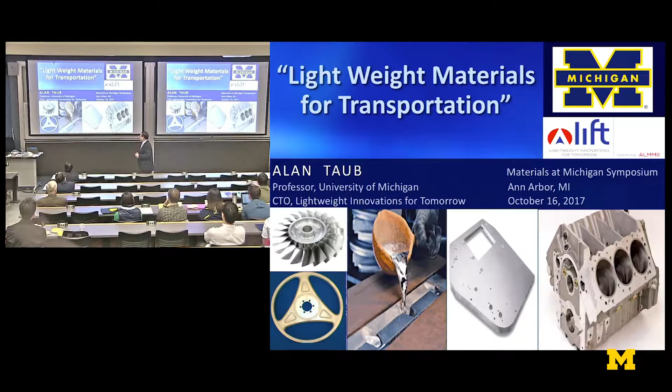What I want to talk about today, and I think it's along the lines of what went on yesterday, is more around structural materials, and in particular, how weight reduction plays in improving transportation efficiency. As John mentioned, I started my career at GE, among other things worked on turbines, both land-based and for aircraft engines. And when I moved to the automotive industry, one of my biggest surprises was the inefficiency of vehicles.

68% of the energy in the gas tank is lost during the combustion process. By the time you look at the rest of what occurs in the powertrain, for every 100 joules of energy in the gasoline, only 17 joules actually gets to the wheels to move the vehicle. And of that, about a third of it is pushing air out of the way, a third of that is heating up the tires and the pavement, and only a third gets turned into kinetic energy.

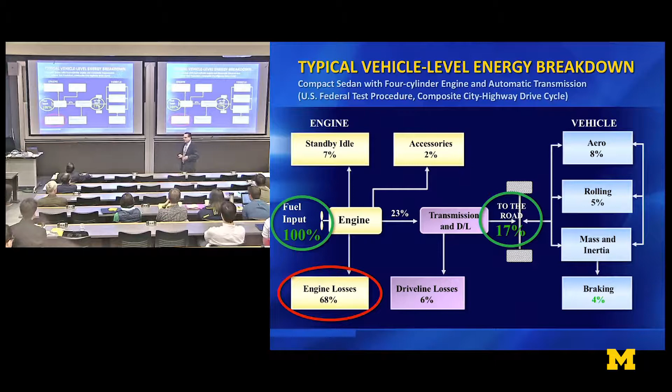So the key is there's lots of work going on here. By the way, this is the reason why the end game for vehicles is electrification - it's a much more efficient transition of chemical and other energy into motion. The key is getting that more cost-effective. On the other hand, independent of what the powertrain is, lowering the weight makes the vehicle move more efficiently, or in the case of commercial vehicles, I get to carry more payload, or in the case of military vehicles, I get to do more mission. So reducing weight is critical.

A good rule of thumb: 10% weight reduction of a vehicle will give you 6% fuel economy improvement. So if you are the chief engineer on a program, which I actually had the luxury of being at one point, you get a target to deliver the fuel economy of your vehicle.

Your job is to achieve that fuel economy at the lowest possible cost, trading off the losses I talked about before, better aero, better propulsion. Within that competition, I often ask my students to calculate what the value of a pound or kilogram reduction on the vehicle is worth to the consumer. It turns out to be about $2 per pound saved, which makes it competitive with other actions. So remember, $2 per pound saved is the target.

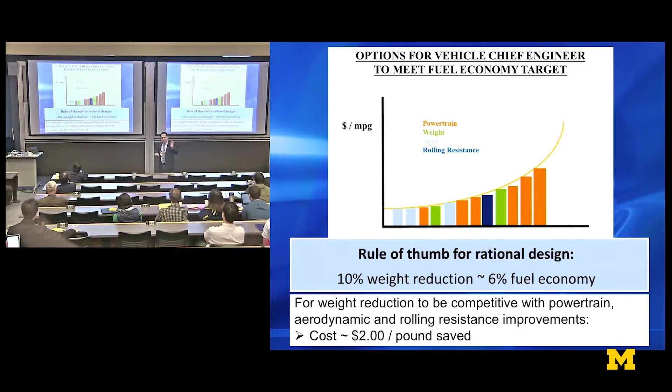I got involved in this through the institute John mentioned. We're working on reducing the weight of all machines that move people and goods, not just on land, but land, sea, and air. I'm learning a lot about ships, working with naval architecture folks, and airplanes. If it's worth $2 to take a pound out of a vehicle, it's worth $200 to take a pound out of a commercial aircraft, and $20,000 to take a pound out of a satellite. That's what it's worth to reduce the energy needed for it to accomplish its mission.

So there are two ways to do that. The first was taken on by the mechanical engineers of the world. I do have a dual appointment, my minor was in solid mechanics, but I believe mechanical engineers look at the world differently than materials engineers and scientists. They'll build an FEA model, and the materials are treated as a continuum. We as material scientists look at the microstructure underneath. In most OEMs, and I've been in three of them, they're dominated by mechanical and electrical engineers, so material substitution is their solution of last resort because of all the risk it has in getting the supply chain going.

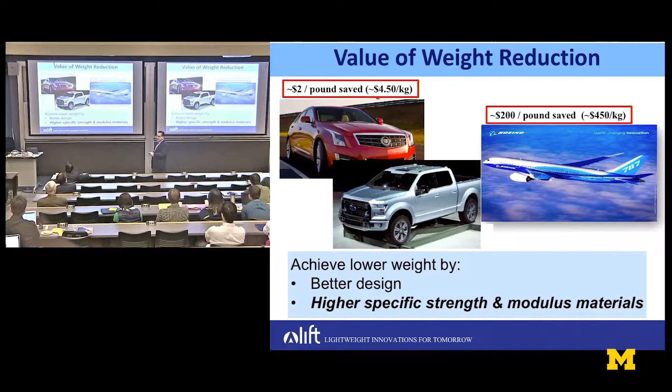There have been prototype vehicles in labs for 30 years or longer, which have shown the kind of weight reduction you can get against what was the baseline material for vehicles, low carbon steel. We've known that for decades. We've also known that each of those material substitutions comes at a cost. The problem is the incremental cost for most of these substitutions is above that $2 per pound saved, with one exception.

It's the introduction of higher strength steels. In particular, it's interesting that the steel industry went through what they called the Generation 1 advanced high strength steel. They tried Generation 2, and it failed. Now jumping to Generation 3, it is the one material that lets you do that substitution at acceptable cost, and I'll go into that in detail.

Metallurgy these days doesn't make the cover of Science very often. We try, I don't know if you had a Science or Nature cover, you know. But we do make the Wall Street Journal often, and it was just yesterday: automakers find strength in steel, and the battle for aluminum and steel is back on. By the way, we got more columns than the battery article, right?

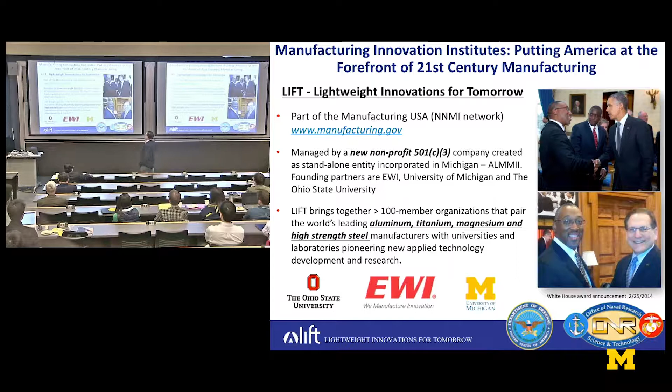But it really has been a strong partnership together with EWI. Our headquarters is actually located in downtown Detroit.

We went into an area that was just about to gentrify. There were burned out buildings across the street. I was all ready to put security 24 hours. It's really nice to go down there now, it's near the old Tiger Stadium, and that whole area is gentrified. In fact, we took an option for 15 years on our lease, which I'm sure our landlord is regretting to this day, because we couldn't rent it today. We couldn't afford to be there.

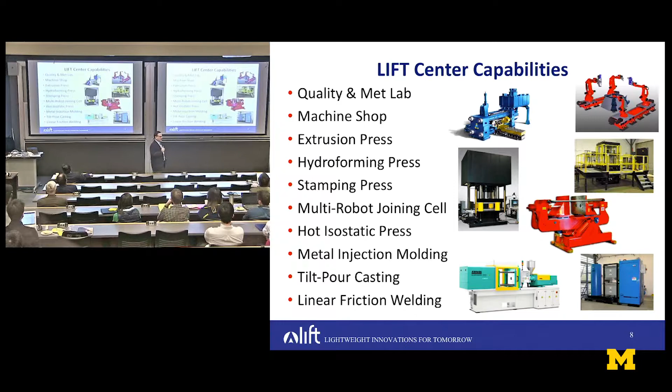One reason I'm doing that is we have installed and recently put online pilot-scale metals manufacturing equipment, and that equipment is available for our students to use. In fact, as long as a year ago, Professor Banu and my students have been at LIFT doing experimental work. So if you need access to pilot-scale manufacturing equipment, please see me.

We made that investment there, plus the university gave us $3 million to put new advanced equipment in the Wu Manufacturing Center down the hall. If you're not aware of these capabilities, please see me.

But let's get back to the technology. We want to reduce the cost of introducing these advanced materials. So if you look at automotive, it has gone through a major change in the last 20 years that exceeds the material change that occurred in the prior 80.

Anybody want to guess what the first primary material in the first vehicles that were produced for the structure of the vehicle was? Wood. There was actually a battle between aluminum and steel in those early days. And by the way, Detroit in southeast Michigan was the Silicon Valley of the early 20th century. There were startup companies, I think close to 100, and they eventually grew up to be the GMs and Fords, just like you have the Googles and Apples today.

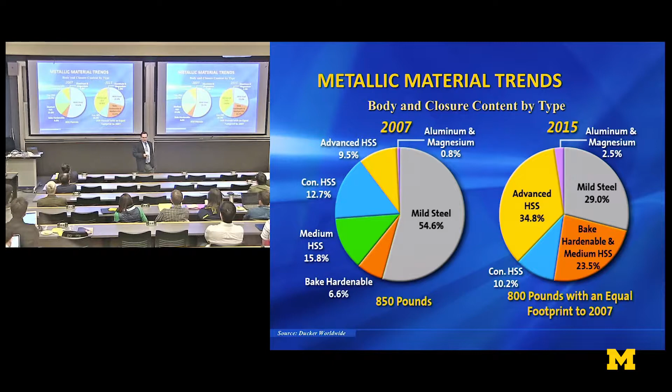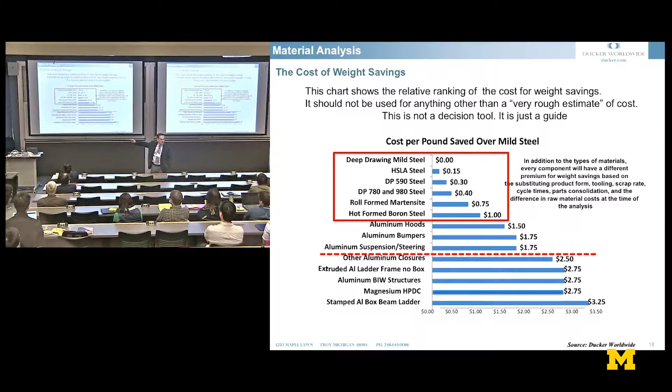What's happened is the majority of the material substitution that has occurred has been the substitution of high-strength steels for low-carbon steels. As you know, when you alloy, you don't change the modulus that much, but you change the strength. If you make something stronger, you can make the sheet thinner, and you make it lighter. And the key is those substitutions can occur for less than $1 per pound saved. Remember that $2 per pound target? So that has dominated the material change in the industry.

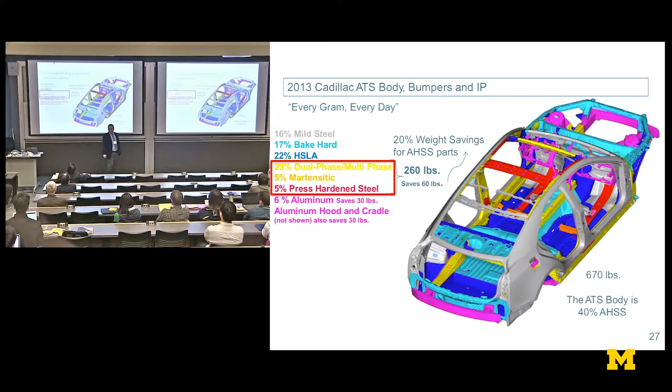I lived through General Motors historically being the heaviest vehicles in their segment, to a focus to become the lightest vehicles in the segment. The Cadillac ATS was the first time we paid attention to that seriously and accomplished it, becoming lighter weight than the Mercedes and the BMW. Most of that was driven by the high-strength steel, but you can see the inroad of aluminum.

And the reality is U of M got out of research and materials for steel quite some time ago, but we are very active with our colleagues in aluminum, magnesium, and titanium, so I'm going to concentrate on that.

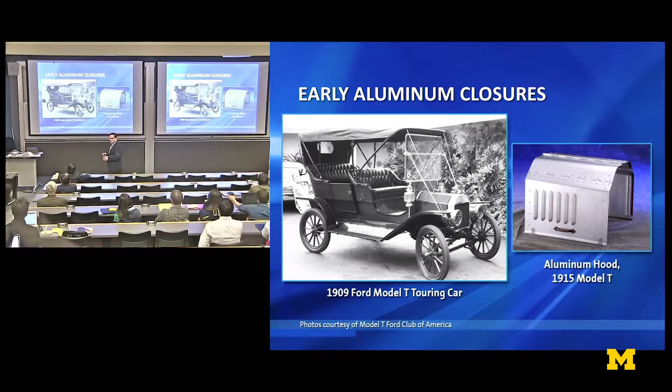I mentioned in the beginning of the industry, there was literally a battle between what was going to replace wood. Steel won. And what's interesting, in the early 1900s, aluminum was expensive because it takes so much energy to make it. It's hard to form, and it's hard to join.

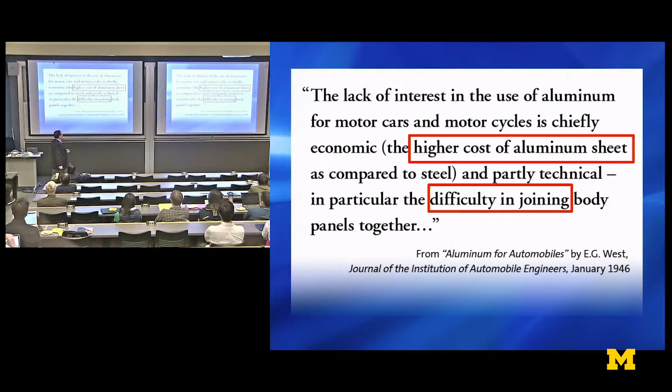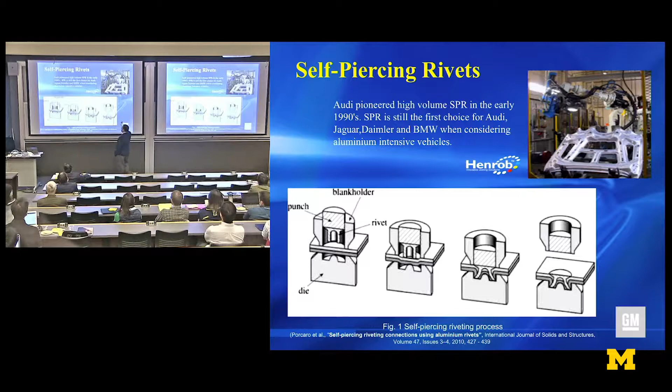Found this 50 years later, same problems. We're at the beginning of the 21st century. We've learned how to form it, learned how to reduce the cost of making it, and learned how to join it—first using mechanical fastening, and then, through the efforts of Jack's group, we've learned how to use conventional spot welding to join it instead of changing over the entire joining infrastructure.

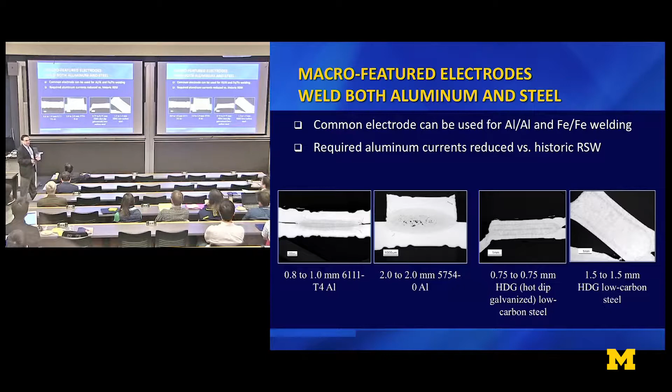One of the biggest bets in material substitution in our industry is the Ford F-150. It is the largest selling vehicle in North America, and in volume, one of the largest selling vehicles in the world. It is a vehicle that is abused—it's a work vehicle. It was a very, very bold move for Ford to make this change.

They put—John, I believe this is true, I was at GM at the time—they had put their best metallurgist on the aluminum body, and it was the advanced high-strength steel frame that they had messed up, which delayed production.

But the key is we can do this today. It still costs more—it's at that borderline of, depending who you ask, $2.25 to $2.50 a pound—but we're ready to do it, and we're ready to do it on high-volume vehicles.

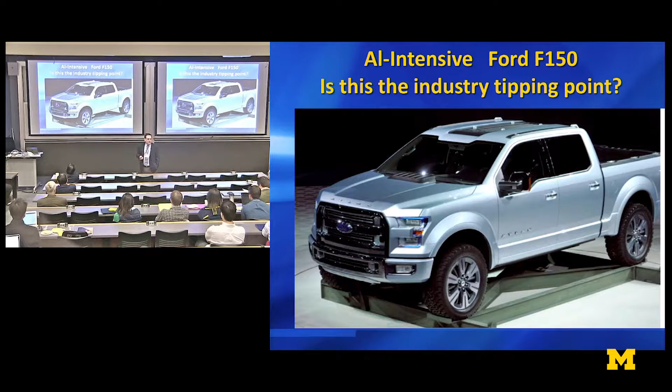So what I want to do is take a small diversion now and talk about one of the two revolutions occurring in structural materials research. One of those, John Allison will talk about later, is ICME, the ability to locally control properties. The other one is agile, low-cost manufacturing.

So a little bit of philosophy. The Industrial Revolution comes along, and blacksmiths, who had been forming parts in metals for hundreds of years, were replaced by million-dollar machines that could apply very high forces over large areas all at once. The reality is, a good blacksmith could make almost any part we make today by that very expensive process—million-dollar machines and tools and dies for $100,000 each. It is the right way to make things if you want to produce 100,000, or a million, a year.

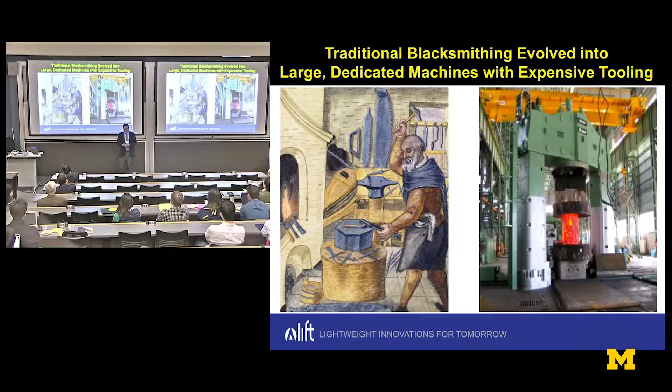But the world is becoming personalized. We as manufacturing people have become hooked and addicted to this approach. One thing we're looking at is what Glenn Daehn's called metamorphic manufacturing. If the first manufacturing was subtraction—meaning machining—and additive manufacturing, which we'll hear about from Jody, this is the idea of metamorphic: changing the shapes of metals and materials using local deformation.

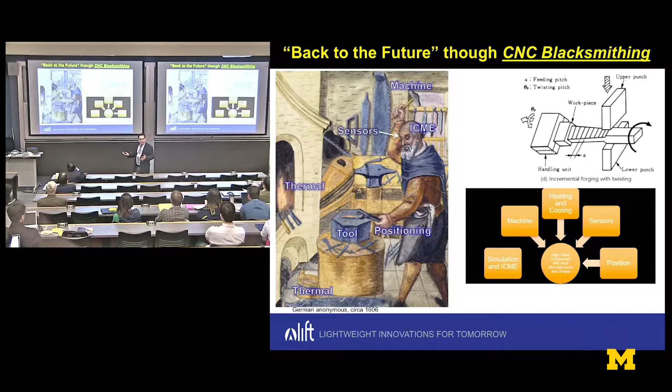So what does that mean? What's the difference between, say, what a stamping machine does and a blacksmith? A blacksmith can control temperature locally and will do the deformation locally. That allows you to get around the need for very strong dies, because you're not using high forces and very expensive machines.

Here is a process we've decided to take the lead on at the University of Michigan. It's called incremental forming, and in particular, incremental sheet metal forming. So instead of having a die and pushing all the metal down at once, you can take a traditional CNC milling machine, take basically a quarter-inch steel tool that's rounded at the bottom, and spiral it into the sheet to form your part. No die required, standard equipment.

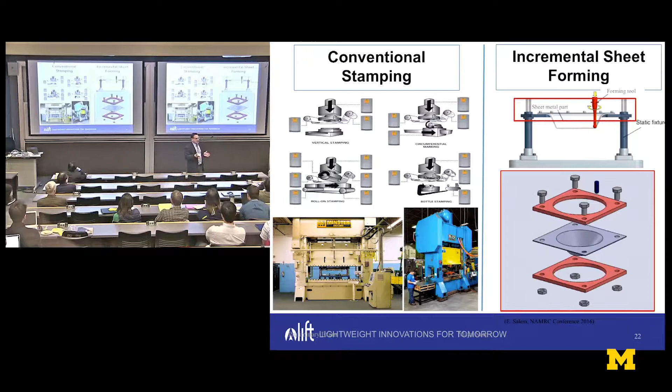And the question is, how fast can we run this? What kind of tool path do you need to make the part form into the shape you want? And what are the properties of the final part? So where do we see this playing?

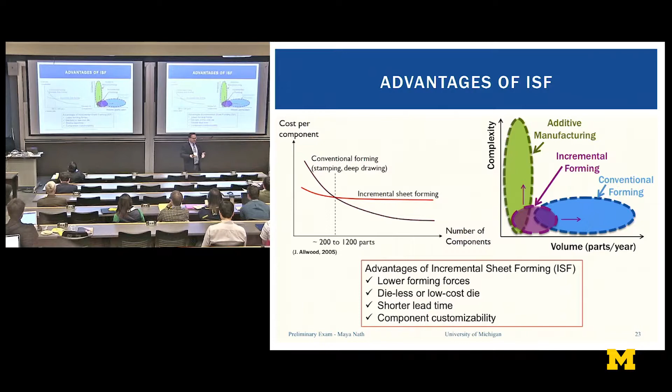At low volumes, even though it's slow, it's faster than additive, and you can get the same kind of properties from hot and cold work material. So we don't have to worry about additive, which basically produces cast properties—we can get cast and wrought. It's the same starting material, deformed in a similar way, and it has those advantages.

At the university, we've set up three ways to do this. I took on the easy part, which was symmetric parts in a lathe.

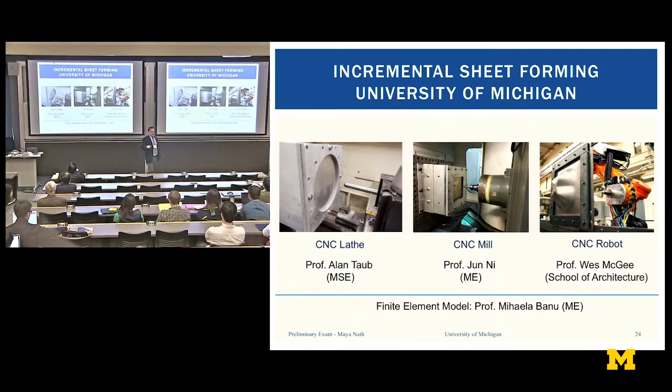Clearly we need to understand how to model and predict deformation and behavior, so we teamed up with Professor Banu over in ME, going after the typical way you go after metal forming, using FEA analysis to say, can we predict the shape that's formed? The real goal: can we predict the spring back, the final shape you get, not just the tool path?

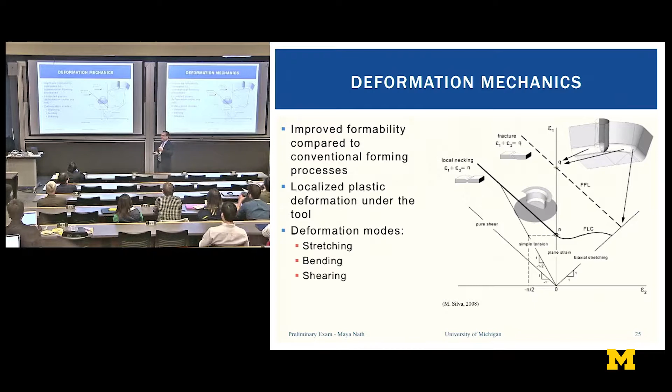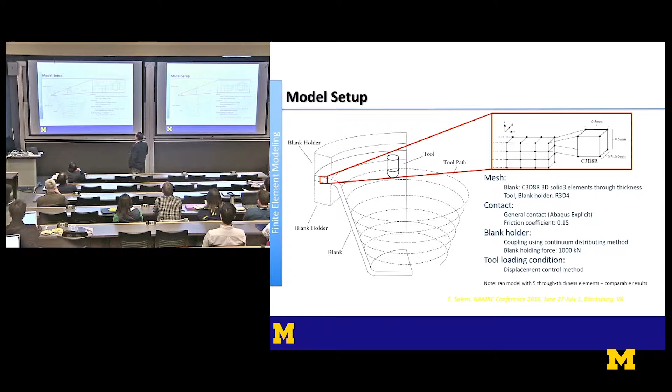We quickly set this up. There were others we teamed up with. By the way, we have a project going on with both Northwestern and Ohio State doing the modeling. The key is using very simple FEA tools.

We were able to predict the shape and, more importantly, the thickness of the finished part. As you deform it, you stretch it, the thickness changes. Here's a 45-degree cone, and you can see the model very nicely predicts the thickness and shape of the part.

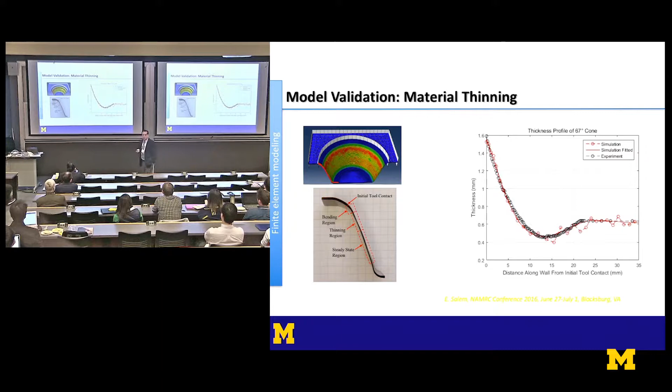What's even more impressive, given the simplicity of the constitutive law we put into this model, near the formability limit, you actually get a thinned region when you start doing the forming, and it predicts that thinning quite accurately. That was something we knew we could make work, and in fact we made it work pretty quickly.

The key is, though - and you'll see this when John gives his talk, I assume - I'm an experimentalist, and in order to do the modeling, we had to use our metallography techniques, including some very elegant EBSD that Maya Nath was doing, in order to establish the starting grain structure, the starting texture.

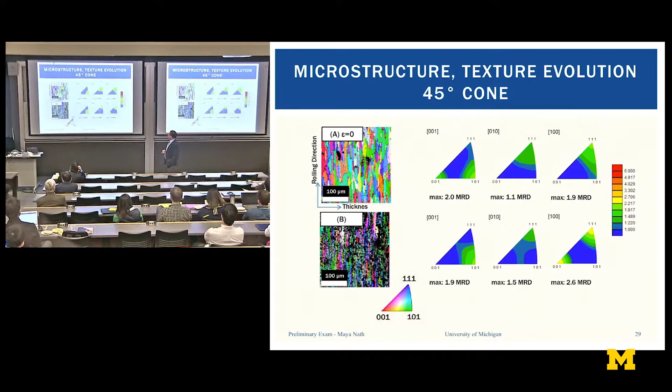And by the way, as the process evolves, we're not modeling the texture evolution, but we had to provide the input of how the texture changes so that the FEA could put in the right numbers. Our goal is to be able to predict the texture evolution using some of the newer ICME tools.

Fortunately, what Maya found was, at least in the specimens we've been looking at, the grain structure changes proportional to the sheet elongation. So we didn't really find any surprises there. We do think at some higher deformation we're getting some recovery and recrystallization, but basically the grain size is mirroring the stretching of the sheet.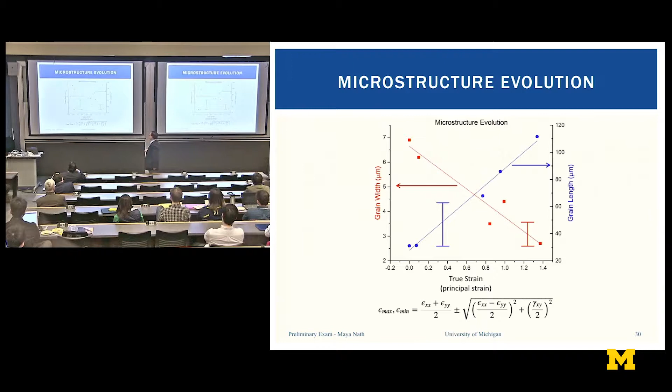But here is - and I said I'd make some interesting remarks about how a material scientist approaches a problem like this rather than a mechanical engineer.

Maya was showing some fracture surfaces. We were looking at the structure. I said, wait a second, in the SEM, what's that on the side? It turns out nobody - and this field's been active for a decade - was looking at the surface finish of the parts.

What she discovered was, not surprisingly, and this is something we're looking at hard, instead of having a stamping die or a deep drawing where the die is basically pulling the material, we're basically doing a wear test - I'm taking a pin on disc and spiraling it through the material. So lots of tribological features on the tool side.

And we have a concern of what that means for fatigue. The project we're doing is with Boeing and Lockheed Martin, who are worried about that. But then, more importantly, looking at the other side, we're actually seeing some surface cracks.

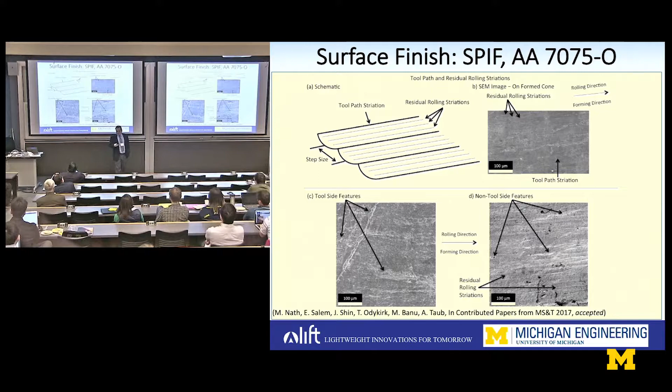So what we know is the strain path is different in stamping than in incremental forming. That leads to different microstructure evolution, which leads to different properties and different surface finish. We really need to look at fatigue critical parts, so that's what we're going after next.

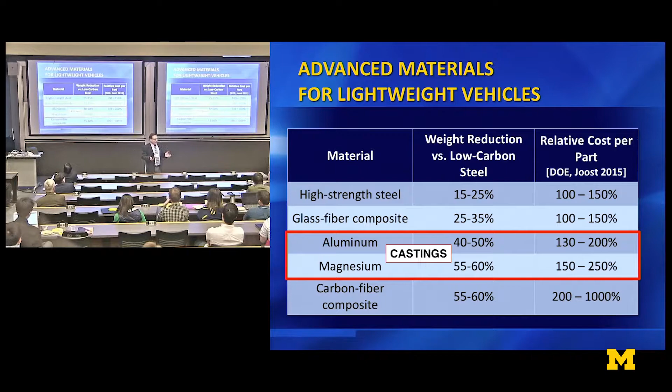Changing to another topic - what about castings? This is what I've talked about is sheet. What happens if we're trying to make lighter weight castings?

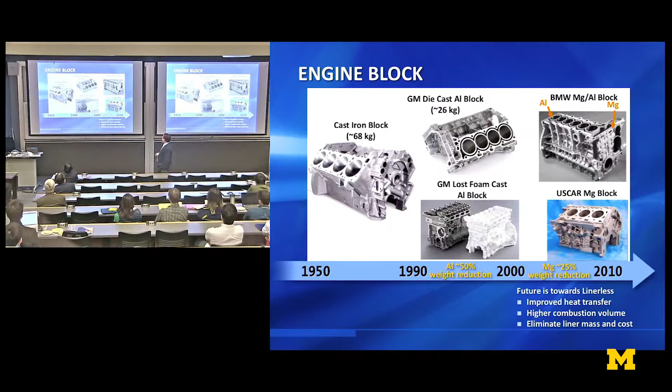Cast iron, just like low carbon steel, was the baseline for castings on vehicles. On the engine side, it's pretty much been replaced by aluminum. Some indications suggest we may even go lighter with magnesium, similar on chassis parts.

So are we done? No. If we can make the aluminum alloy stronger or higher modulus, we can decrease the wall thickness and make the casting lighter. People had been doing that by putting in 10, 20 micron particles to refine grain size, creating a dispersoid strengthened casting. The key is, metallurgy has been dealing with nanomaterials forever, we just didn't call it that because that's what nature provides.

We found, working with our colleagues at Worcester Poly in Massachusetts, that if you put in nanometer scale particles—we call these ceramic particles, even though they're not oxides—you can get dramatic improvements in strength. More importantly, we can retain the properties to higher temperatures. And that's really the goal.

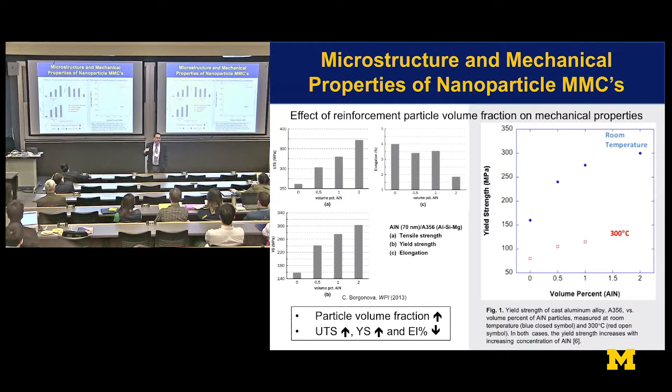There are lots of intermediate temperature applications where we would like to replace castings with aluminum or go to thinner wall, and this can enable it.

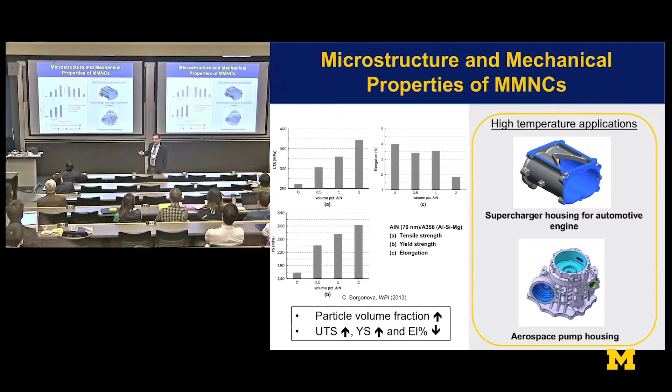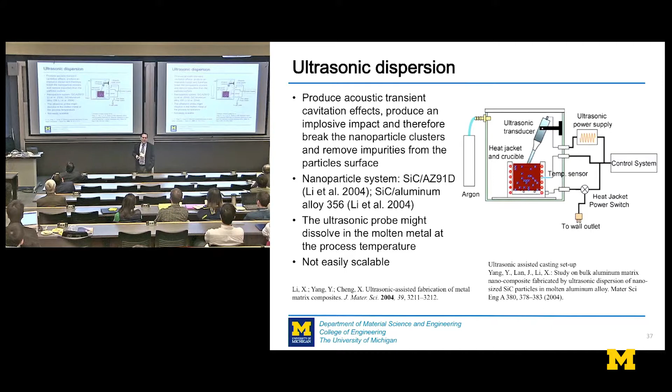The problem is, it's actually the inverse of what Sharon Glotzer talked about yesterday. Our problem is not how do the particles collect, our problem is dispersing them because they don't want to separate. The traditional way of doing that, by inserting the particles in the melt and ultrasonically dispersing them, hasn't proved very effective when we get down to 50 nanometer particles.

We don't take credit for this, it came from Worcester Poly, Diran Apelian in there: wait a second, can't we form the particles in situ in the melt? So they start off naturally dispersed.

They came up with the idea of bubbling nitrogen through the molten aluminum. It reacts in situ and forms aluminum nitride particles, which turn out to be of the size we want. They then showed you can bubble methane, or actually CO2, into an aluminum alloy with a little titanium and form titanium carbide. So we now have a way that worked at lab scale to produce nanoparticle reinforced aluminum.

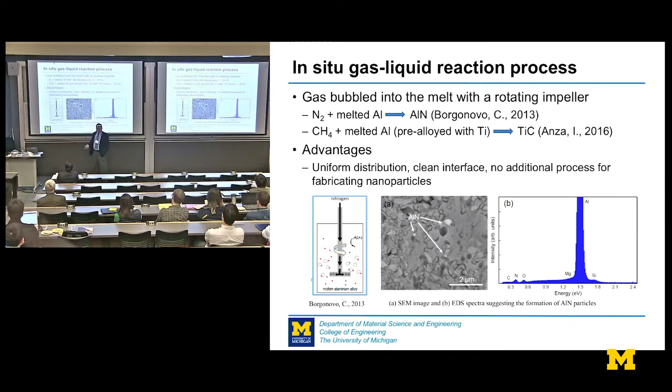We have the role of characterizing both the microstructure and the properties there. You can see we do form aluminum nitride particles. The thing is, now we're trying to scale it up.

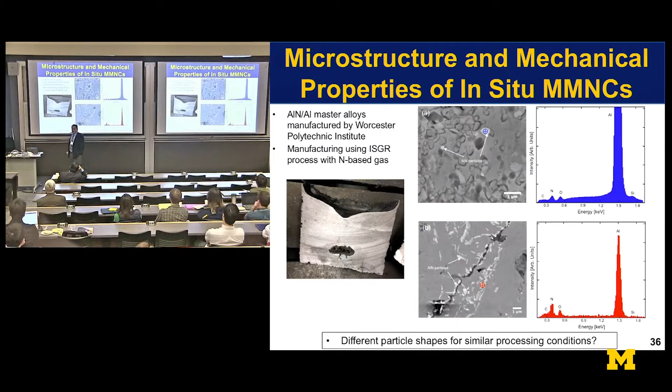One of the things that Jun Liu and Caleb Reese, a postdoc and graduate student on this, found very recently is that under what we believe are the same operating conditions, we get nicely spherical particles in one case, and all of a sudden we're getting acicular plates under basically the same conditions.

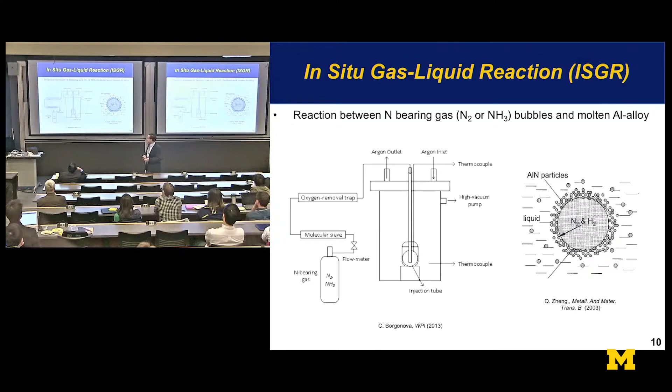So we started an activity here, working with Professor Shahani and Rachel Goldman, to better understand the reaction occurring between the nitrogen bubble and the melt. We're just getting this going, looking at different techniques: how do those particles nucleate, how do they break up, what is controlling the morphology of the particles. So stay tuned for that.

Going to switch to another material we're investigating: carbon fiber composites. It is the way to make the lightest structures. It is also the way to make the most expensive structures. Remember, $2 a pound for automotive, $200 per pound saved for aerospace.

It's no wonder the baseline material for aircraft became aluminum right away—it almost went straight from wood to aluminum. They're now trying to make the transition to carbon fiber. When I was at GM, we had a joint venture laboratory, owned 50-50 with Boeing, so I used to interact with John Tracy, the CTO there, all the time. And that plane is costing them a lot more to make than they thought it would.

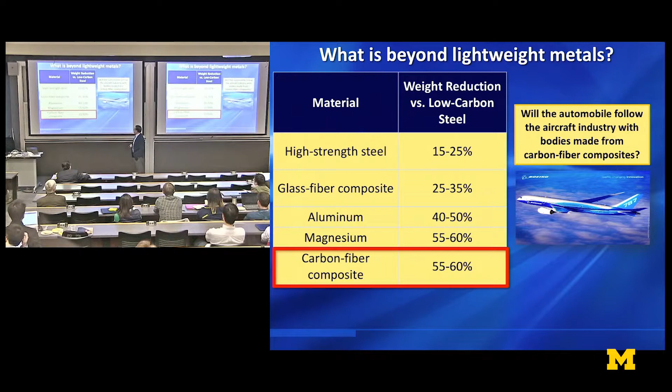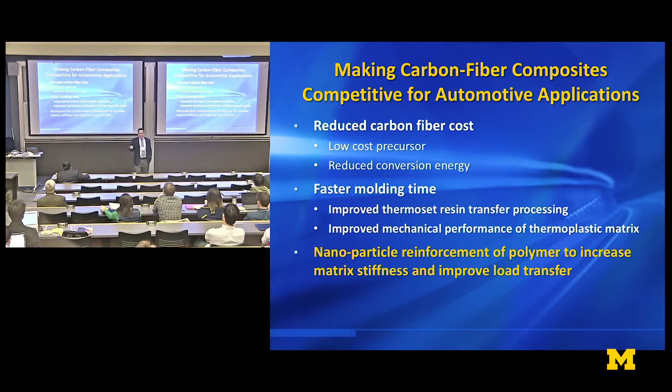So the key is, how can we reduce the cost of the carbon fiber? Lots of people going after reducing the cost of the fiber. Other folks going after how do we improve the molding time. Both of those drive cost. What we're going after is how do I improve the mechanical properties of the composite by strengthening the polymer matrix. It's been known, one of the earliest ideas about using carbon nanotubes was strengthening polymers.

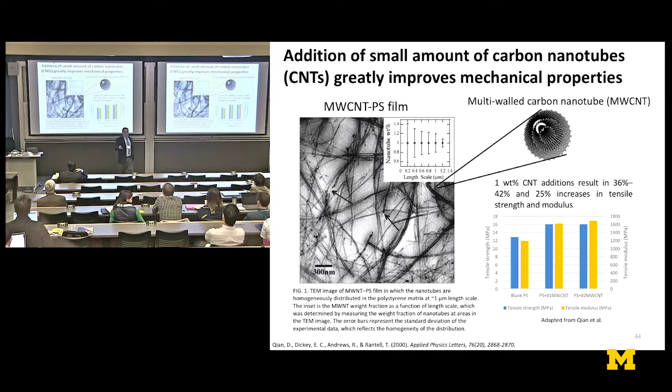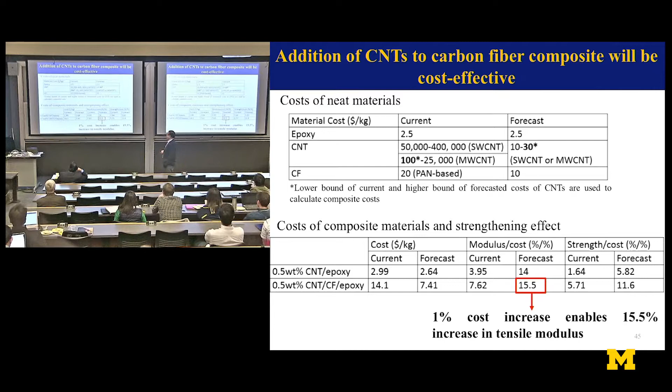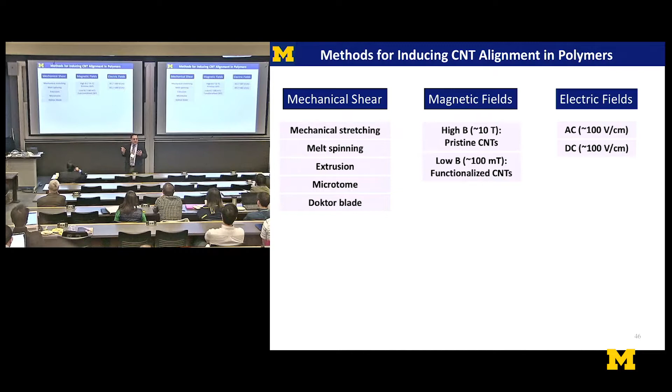So the key is, could we add that to the matrix of a carbon fiber composite, and by increasing the strength of the matrix, increase the load transfer and reduce the amount of carbon fiber to get the same thing? That turns out, at least on paper, to be economically attractive. And what we wanted to do was not only add the nanotubes, but align them in the direction in which the stress was applied.

Several ways to do that, and I'm now suffering with what I now realize professors have to deal with. I spent most of my career on the receiving end of graduates, and that was great. I now have my first student leaving. Just when they get good, they leave us, right?

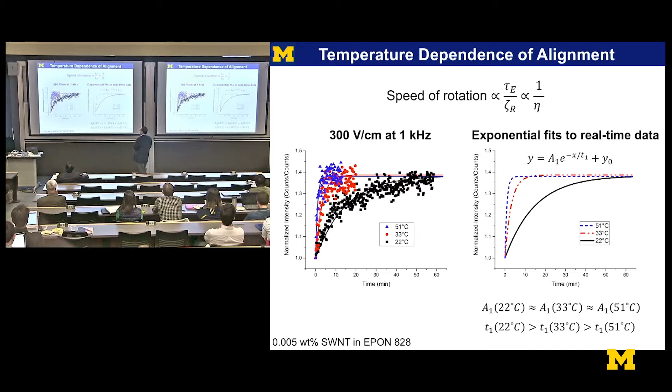But Wes looked at it, we came up with a way, collaborating with Professor Lahann and Kieffer on their Raman spectroscopy, to do real-time measurement. This was the first time it was done of carbon nanotube rotation under different applied fields, whether electric, magnetic, or shear. We found we could fit it to nice exponential functions.

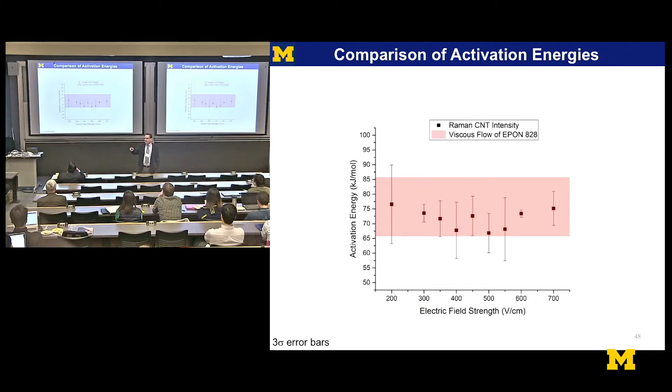Because I tend to look at kinetics, I was hoping, oh geez, these are nano in one dimension, maybe we don't look like it's macroscopic or microscopic rotation kinetics. Turns out the rotation, even because we're long in one direction, is actually controlled by the same kinetics, which is the viscosity of the medium it's in.

But then he found something else, which for months I kept saying was an experimental artifact. There's something that's not making sense here. He was doing electric field alignment, and as the electric field gradient went up, not only was it going faster, but it was reaching different plateaus. And in fact, it was reversible. It was acting like a state function.

I said, wait a second, I understand mechanics, I understand diffusion. You put a different gradient on it, it should just happen faster, it shouldn't get to a different end state. Wesley stuck to his guns and was able to prove that this was due to the length distribution of the carbon nanotubes, because the driving force and the torque depends on length, and in this case, so does the polarizability.

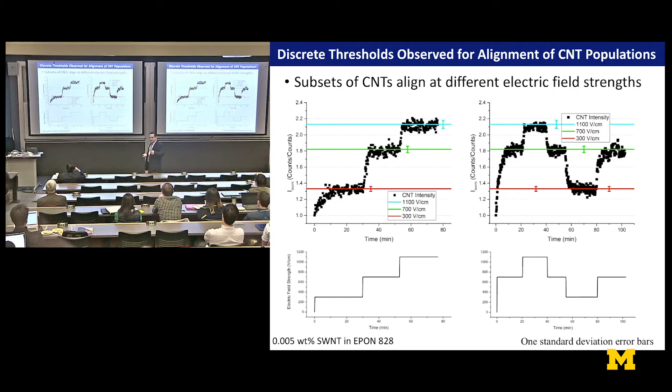This is due to different populations based on length of the tubes aligning. So the good news is we now understand the kinetics, we understand what it takes to drive them to align. So what happens if we want to induce that alignment inside a carbon fiber composite? We're just at the point where this is starting to work.

Interesting thing, which in retrospect we should have realized from the beginning: carbon fibers are electrically conducting. By definition, electrical conductors can't sustain a voltage gradient. That means along the length of the fiber, near it, there's no voltage gradient. It also means, as a COMSOL model shows, we get a higher gradient right at the edges. Well, that's where you want the increased load transfer. So it turns out nature is working in the right direction.

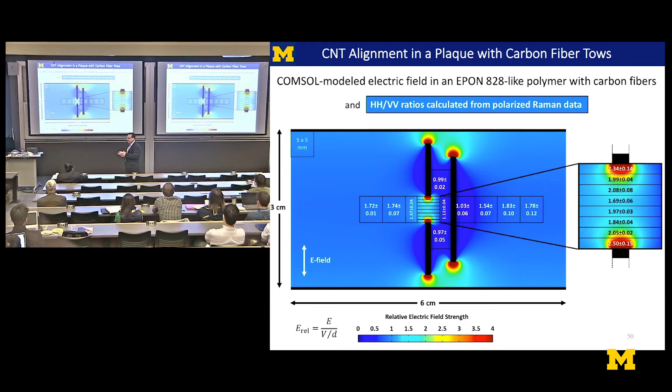And the Raman spectroscopy is showing the alignment occurring in the direction we want, in the location we want. The issue now is, in order to do the Raman, we're doing it at very dilute levels of the CNTs, so now he's going to be increasing it in the 2 weeks he has before starting his job.

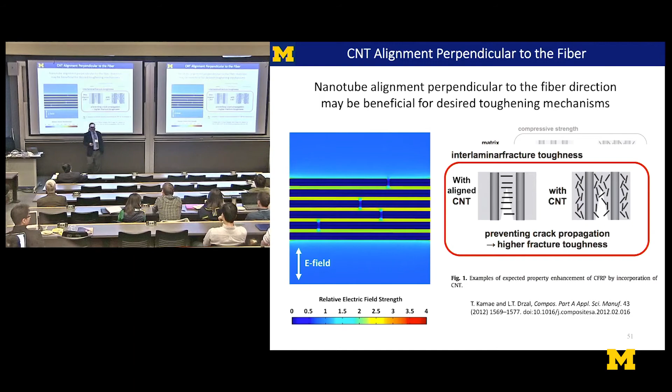The other thing is, can we get the alignment for load transfer in between the carbon fiber tows? So just to finish up, you might ask, wait a second, am I just hedging my bet? I'm working on, and so are other people here, 3 different classes of materials. Is it just because I'm not sure which one's going to win?

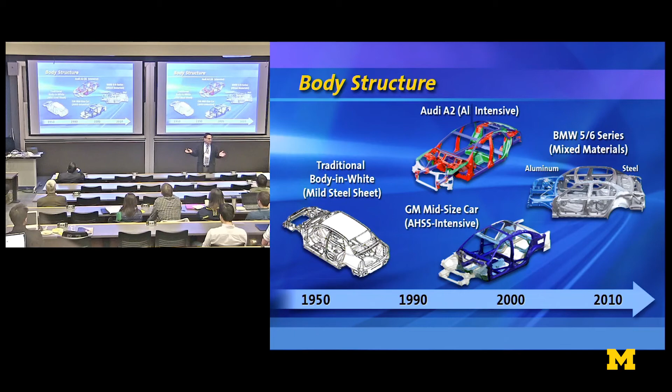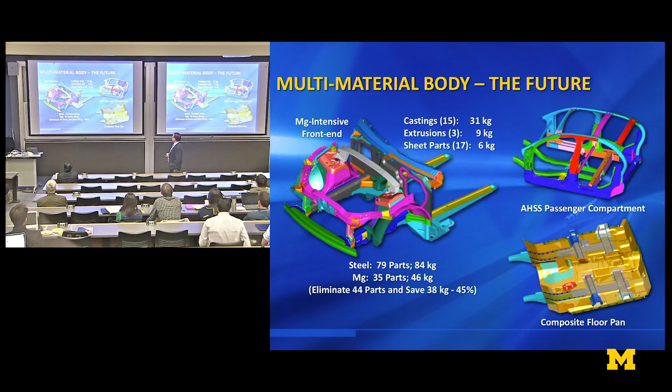No. Going back as recently as 15, 20 years ago, the assumption was we were leaving low-carbon steel vehicles for other mono-material-intensive vehicles. We now realize we've gotten much more sophisticated. No, the answer is the right material, in the right form, in the right place. So all structures are becoming complex mixtures of materials, and we need to master manufacturing them in all these shapes with all the different materials.